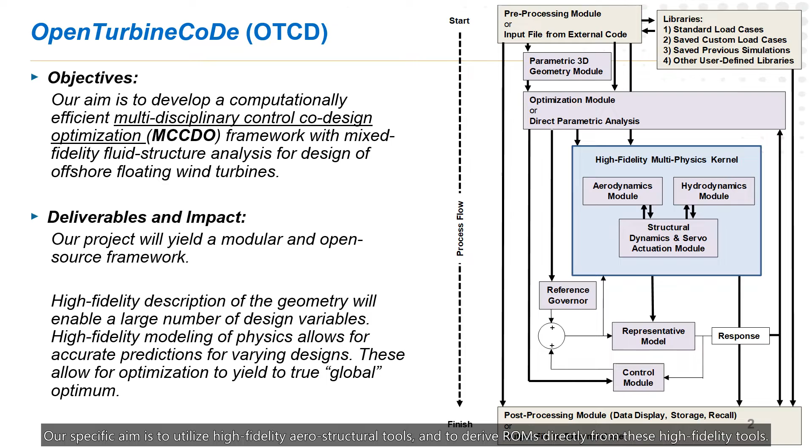Our project is executed by a multidisciplinary team consisting of Rutgers University, University of Michigan, Brigham Young University, and NREL as primary partners. We are also collaborating with the National Technical University of Norway and the Technical University of Denmark.

Traditional wind turbine designs frequently rely on the design and optimization of each subsystem in an independent manner. This is often referred to as a sequential design approach. Today's floating offshore wind turbines are highly coupled systems of electrical grid, power electronics, and different structures and mechanisms interacting in a dynamic fashion with the surrounding air, water, and soil.

In this project, we consider a control co-design approach, taking into account the interaction between the subsystems and applying control concepts in the design process with the aim of obtaining a more optimal solution. Traditional wind turbine controllers are based on simple 1 degree of freedom models. Therefore, the mechanical fatigue or equivalent damage load is not taken into account in the controller's design phase, but it is only computed a posteriori.

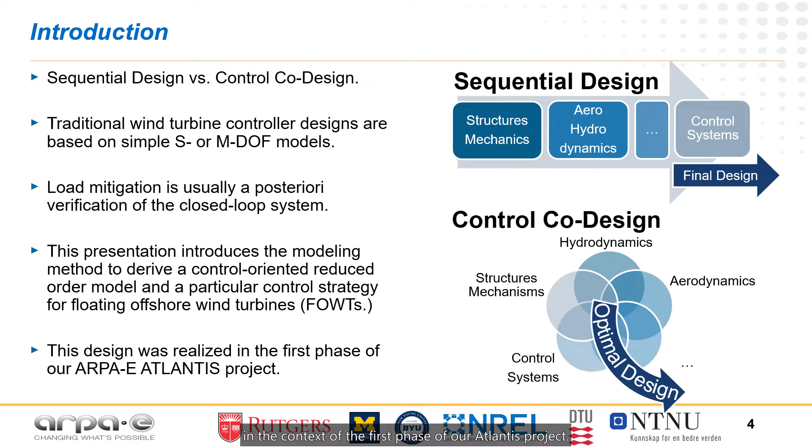This presentation introduces the modeling method to derive a control-oriented reduced order model and a particular control strategy for floating offshore wind turbines in the context of the first phase of our Atlantis project. During this short presentation, I will first introduce the reduced order modeling module and explain how we can get a representative model of a floating offshore wind turbine that can be used to design the control system.

Next, I will introduce the Control and Reference Governor module. I will briefly describe the state of the art of wind turbine controllers, and then I will introduce our novel approach, which consists of two main ingredients: H-infinity controllers and reference governors. After that, I will show some results and discuss the benefits of our approach. Finally, I will talk about the ongoing and future work in our Phase 1 ARPA-E project.

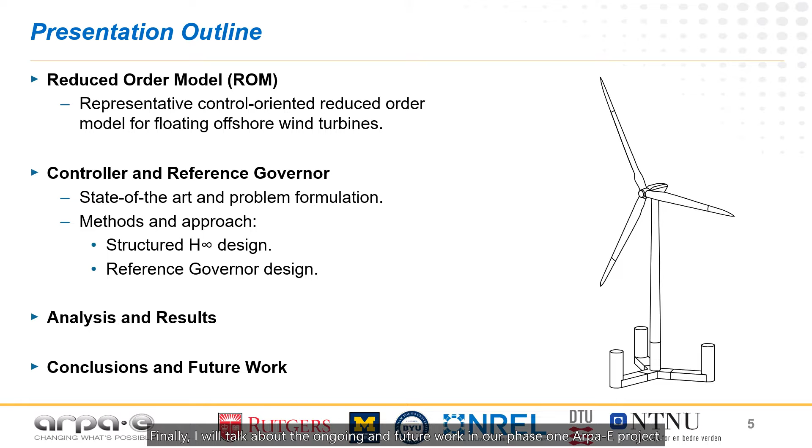Traditional wind turbine controller design is based on a simple dynamic model where only the speed of the generator is of interest. Therefore, a first-order model like the one displayed here is sufficient. This is the case of the legacy wind turbine controllers and the recently proposed ROSCO controller currently being tested on a small-scale wind turbine at the University of Maine.

As exemplified in the motion picture on the right, innovative concepts of floating wind turbines tend to have very long and flexible blades and in general slender and flexible structure. In our approach, we aim to make the wind turbine extract the desired wind energy while reducing as much as possible the mechanical fatigue of the structure. To do so, we consider a multi-degree of freedom model to capture the dynamical behavior of the main structural components of the system.

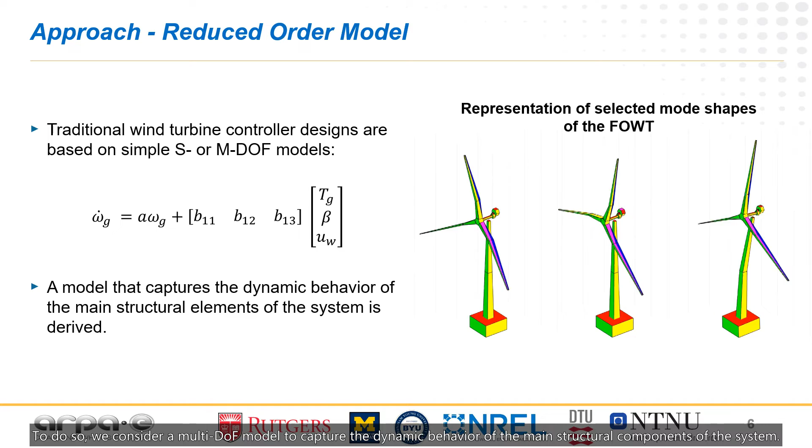Here, I introduce the reduced order model to be used through the controller synthesis. We can see an illustration of the model in the figure on the right. This model aims to capture the dynamical behavior of the main structural components of the system, namely the floating platform and the dynamic vibration absorbers, the tower and the nacelle, the drivetrain and main rotor, and their interaction with the surrounding air, water, and soil.

The equations of motion are derived using Euler-Lagrange mechanics, assuming interconnected mass spring damper elements. Euler-Lagrange equations are written in terms of kinetic energy and both conservative and non-conservative generalized forces. The contribution of conservative forces are related to the potential energy of the system, while the contribution of non-conservative sources are related to aerodynamic and hydrodynamic effects, damping mechanisms, and forces made by the actuators.

The aerodynamic coefficients of the rotor blades are assumed to be a function of both the pitch angle and the tip-speed ratio of the blade. The parameters and coefficients that feed the reduced order model come from other sub-modules. Actuator dynamics and nonlinearities such as magnitude and rate saturations are also considered in the modeling process.

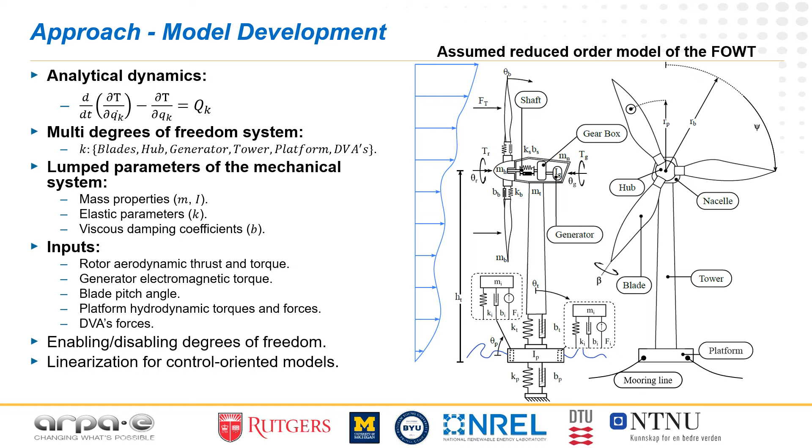The control system is responsible for driving the blade pitch, nacelle yaw, generator torque, and platform actuators, aiming to maximize the power coefficient while mitigating extreme loads on the structure. As already mentioned, our controller is based on two ingredients.

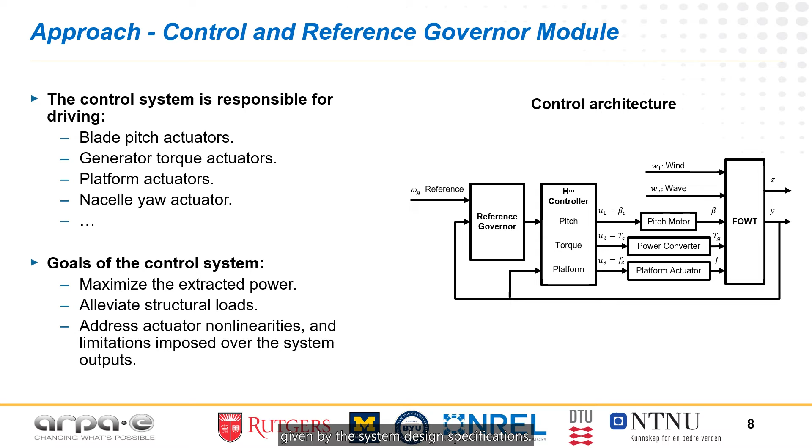First, we work with a synthesis of structured H-infinity controllers. They are designed not only to make the generator speed track a desired reference, but also to reduce mechanical fatigue. Next, we add reference governors to the closed-loop system to deal with system nonlinearities and address constraints given by the system design specifications.

When formulating the control problem, we assume the configuration shown in the figure on the right, which represents the closed-loop system. P is a floating offshore wind turbine model, and K is a controller which uses the output measurement Y as inputs. The outputs of the controller block are the control signals and are applied to the wind turbine. The H-infinity method consists of minimizing the infinity norm of the closed-loop transfer between the inputs W and outputs Z.

In other words, we seek to minimize the impact that the wind speed variations, the wave perturbations, and changes in the desired generator speed have on the generator speed tracking error, but also on the vibrations of the tower and blades. The tuning of this controller is based on some recent developments that are now extensively used in aerospace applications. This method allows us to choose the structure of the controllers.

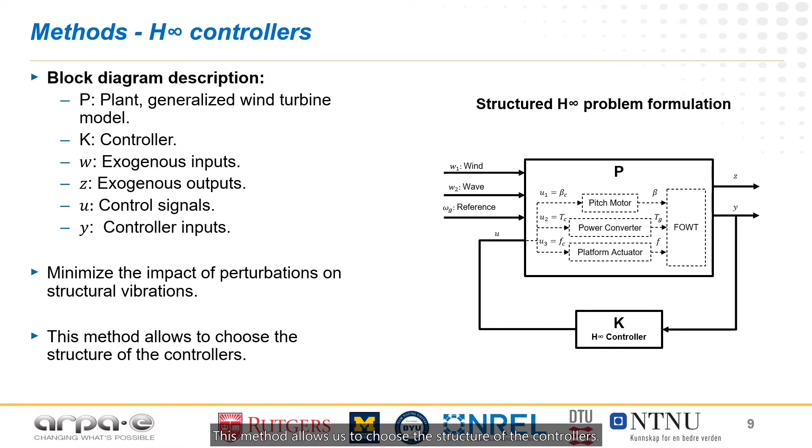Linear controllers, like the traditional wind turbine controllers or the proposed H-infinity controller, do not consider actuator magnitude and rate saturations, nor some other system limitations. It is well known that actuator saturations can destabilize a control system. So, after the controller design is done, we can focus on the reference governor design.

Reference governors are add-on schemes for dealing with constrained systems. Here, they are used to keep some variables or control inputs within their limits and are only active when these limits are prone to be violated. They can be used to address blade pitch actuator rate saturations, platform actuator maximum allowable stroke saturations, generator speed tracking error constraints, or actuator power consumption limitations.

Reference governors can be combined with any pre-stabilizing controller because they only modify the reference to be tracked by the closed-loop system when this one is about to violate some constraints, keeping the control system stable.

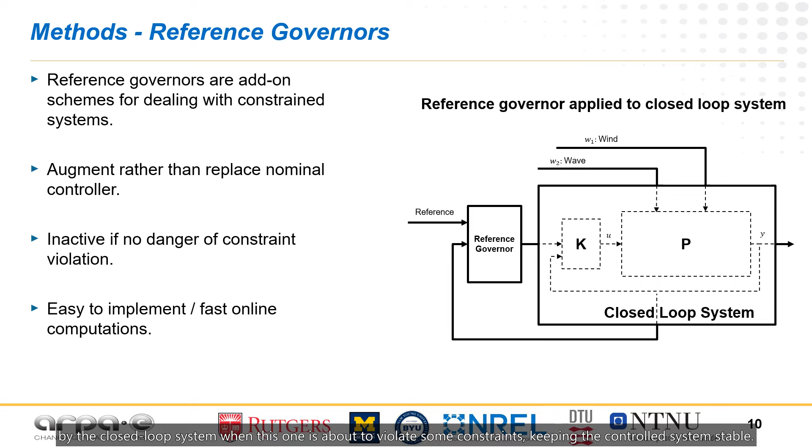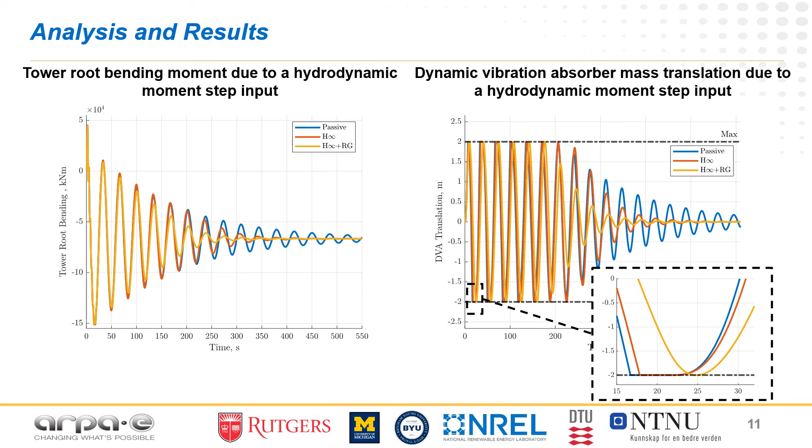So far, we have demonstrated that our robust controllers can reduce the mechanical fatigue while extracting the same amount of wind energy. These structured control methods also allow us to use more measurement inputs and enable smooth transitions between the operating points. We have worked on blade pitch controllers, torque controllers, and platform controllers. In the near future, we will also design the control system with the MIMO approach in all the regions of operation.

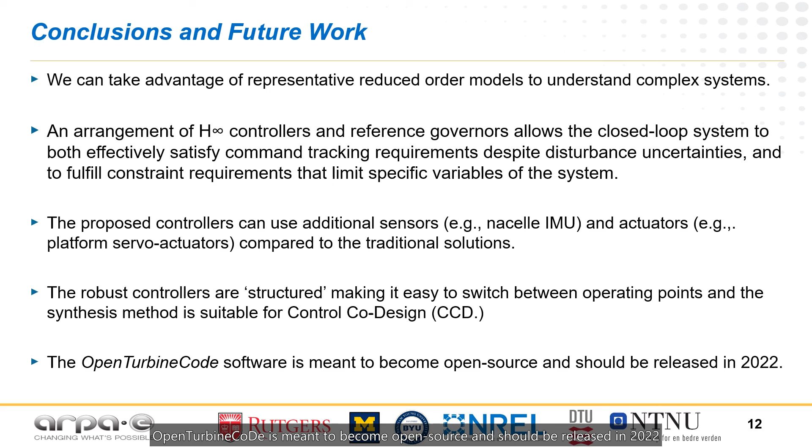In the future, we would like to implement our control strategies on the small-scale wind turbine of the University of Maine. OpenTurbineCoDe is meant to become open source and should be released in 2022.